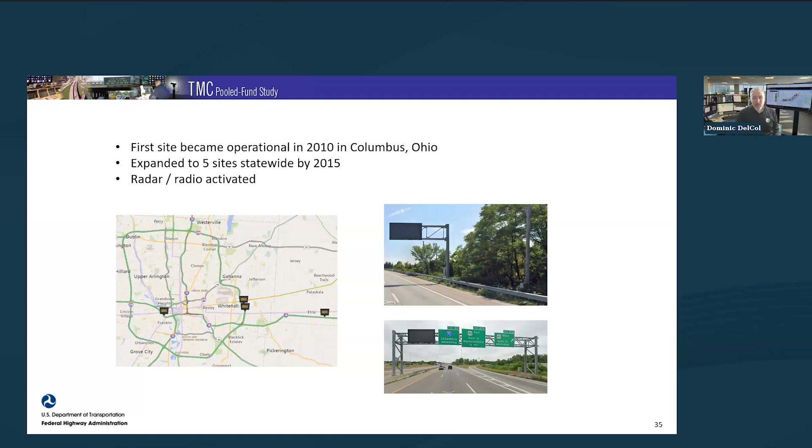Like for instance, if it was a holiday and there wasn't any traffic, we would have to take them down, or maybe rush hour started a little late, etc. Right. So this process lasted about 10 years. The signs were basically an afterthought. They were often taken offline for long periods of time, even during construction, which would probably be the most helpful time to have these signs activated, to alert vehicles ahead of queues.

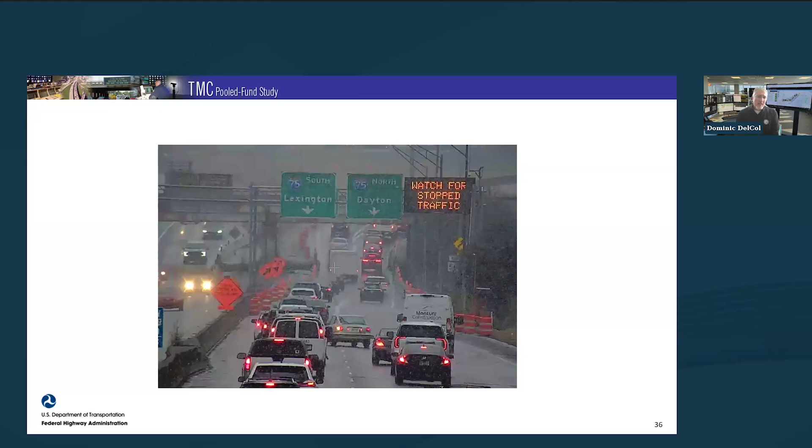Next slide, please. This is just an image of one of our sites in Cincinnati. As you can see, it looks like it's in the middle of a snowstorm, and this is actually when it was active in the middle of construction. This is one of our 2 locations in Cincinnati. Next slide, please.

So this takes us up to almost present day. So on November 14th in 2023, there was a fatal bus crash just outside of Columbus, Ohio on westbound I-70. Traffic was queued up due to an incident on the right shoulder about a mile ahead of the crash. The bus was carrying a high school band from Eastern Ohio to Columbus, Ohio to perform a concert.

A semi-truck traveling at an excessive speed collided with an SUV. Inside the SUV were a teacher and 2 chaperones. The SUV then collided with the bus with such force it took hours before first responders even realized there was a vehicle between the semi-truck and a charter bus. ODOT knew for years that end of queue crashes were a major problem and only getting worse, mostly due to distracted driving. Unfortunately, sometimes it takes a tragic event to cause change.

So, important note, during this time frame, ODOT was in the midst of a massive expansion of our wrong-way detection system, which is also a major issue, obviously. So systems were in Cincinnati. Locations were added in Cincinnati. The Dayton system was just coming online. Cleveland was just being installed. So our ITS section basically had to make a hard pivot and use some of the same technologies being used in the wrong-way systems to install a whole new from-scratch queue warning system on the fly.

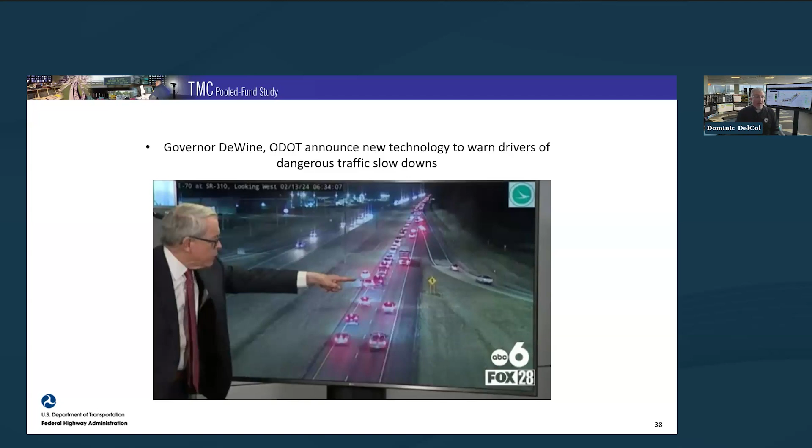It's estimated that there were a total of 8,800 end of queue highway crashes in Ohio in 2023. So this is the exact location of that bus crash a few months earlier. So it is a normal occurrence during morning rush hour. The site became active on February 15th, about 3 months to the day of the fatal crash. In ITS project terms, it's almost moving at light speed. So from the bus crash to the installation of the new site was about 3 months, which is unbelievable in our terms. Next slide, please.

So this is that. Oh, could you go back a slide? I think we skipped one, maybe. There we go. Okay. Yep, there we go.

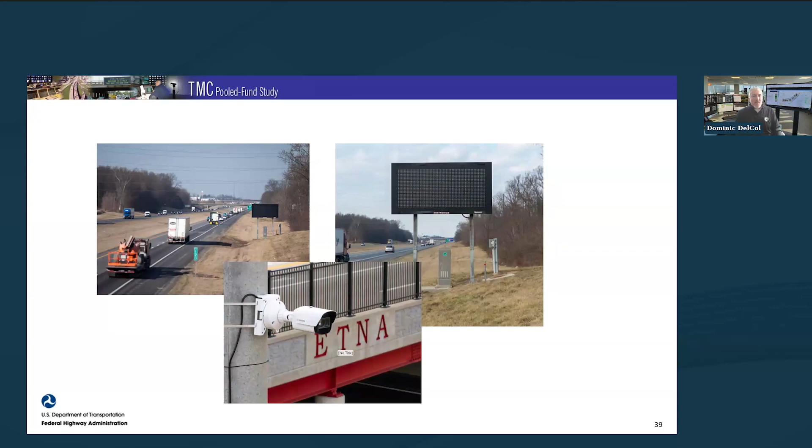So this is actually that new site out at State Route 310. It actually uses fixed queue detection cameras. They're actually mounted on a pole. So this is actually about a half a mile behind where the fatal bus crash was. That overpass, I don't know if you can kind of see it in the background, that's actually State Route 310, and the on-ramp from 310 to westbound is a heavy merge area and causes a lot of morning congestion. So that's what actually helped cause that crash. Next slide, please.

So the new system uses Milestone alerts. We use stationary cameras to help detect slowdowns and it actually sends alerts through Milestone. Milestone is actually the system we use to view cameras in our traffic management center. It helps to detect slow and stopped traffic. Traffic ahead messages automatically post to queue warning signs through our ATMS.

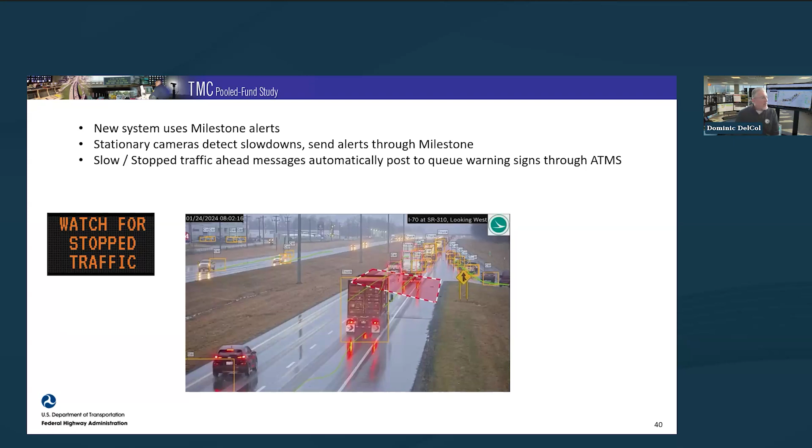I think there's a video attached. Would you mind playing it?

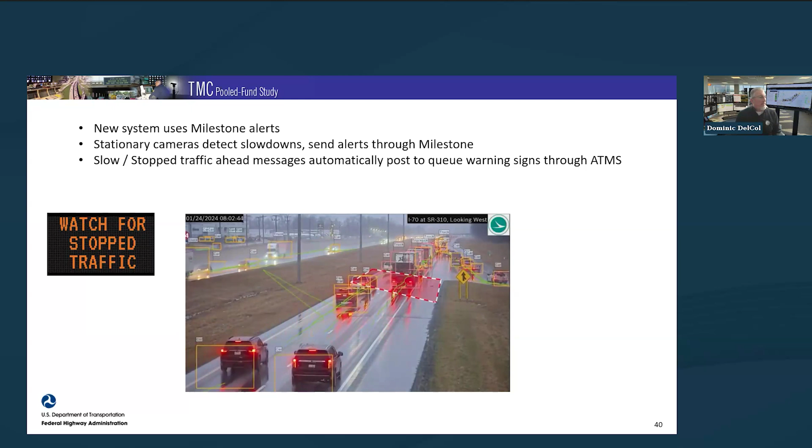So as you can see, as traffic goes through these areas and goes through the box, it's basically sensing how much time the vehicles are spending inside the red box, and that's what helps trigger the queue warning signs through our ATMS. Next slide, please.

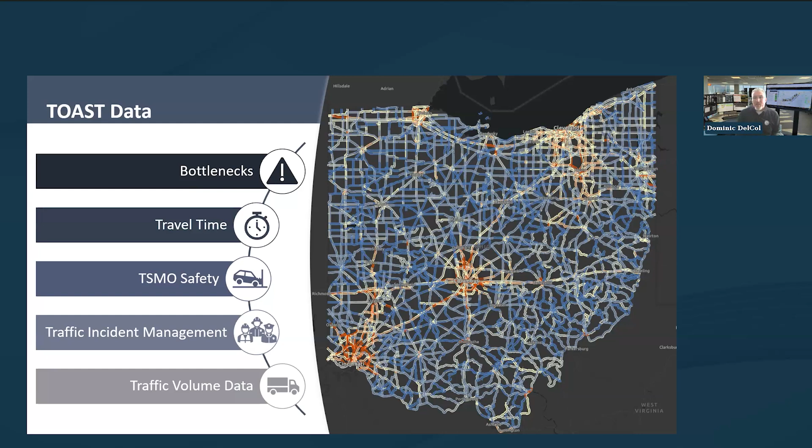So this is TOAST, the Traffic Operation Assessment Systems Tool. Basically it's a scanning tool to help identify operationally sensitive corridors that may benefit from TSMO strategies. We scored 11,000 corridors statewide using 5 main data categories: bottlenecks, travel time, TSMO safety, traffic incident management, and traffic volume data. We also use bottlenecks and travel time probe-based crowdsourced data. We use all of this data along with ODOT district input to help determine the locations of our new queue warning systems. Next slide, please.

So using all of that data, we helped determine 13 locations throughout the state to install these new systems. These sites will be in and around major urban centers that have been identified by ODOT as high congestion, high crash areas. Once the technology is installed at all 13 sites, ODOT anticipates it will help reduce end of queue crashes by at least 16%, which equates to around 1,400 crashes. These sites are expected to be active within 2 years. That's really all I got.

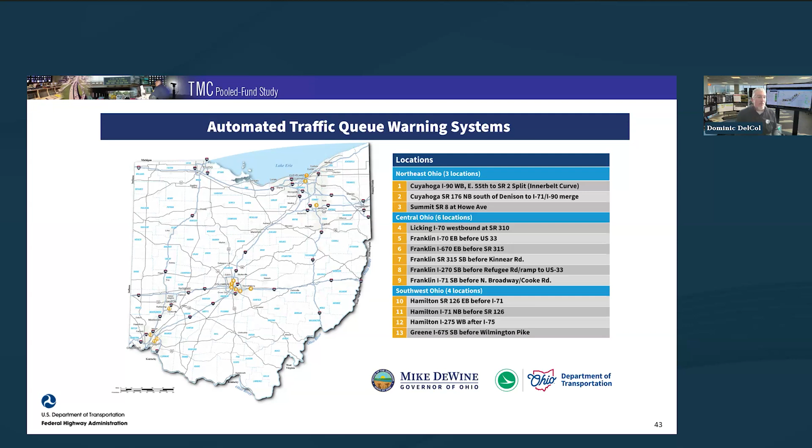Okay, thanks, Dominic, for that fascinating look into ODOT's alert and warning system. Our final speaker, David Gaffney, is the TMC Operations Manager at Pennsylvania DOT, and he will be talking about Pennsylvania DOT's use cases and implementation of queue warning messages. Thanks, Alex. Good morning, everyone. Like Alex said, I'm going to discuss PennDOT's experience with queue detection, monitoring, and management.

Next slide. So for us, there are a couple of different ways we had managed queues in the past, and to some extent, we still use these methods in certain areas. The first one is work zones, where we would rent a queue detection system through a construction project as part of the work zone traffic control plan. The concern with those is they're often very expensive. And if they're not programmed into the funding for the project, it can be difficult to add these systems to projects later. This has sometimes led to decisions not to use the systems. And for the safety benefits of the systems, we really wanted a solution that would allow us to better manage those queues in work zones.

The other method is using manual detection. So an operator sees a queue and then reacts to that queue. Often those operators are working on multiple incidents or roadways all at once, and it can be difficult for them to keep up with the changing queue. They also may simply create a message that addresses the cause of the queue, but not where the queue is or where that concern is for those drivers. So with that in mind, we started working on a solution that could be deployed quickly to corridors where existing probe data or detectors could provide a level of queue detection, and then from there, monitor and message those queues in ways that operators can't, at a much lower cost than some of the traditional queue detection systems. Next slide.

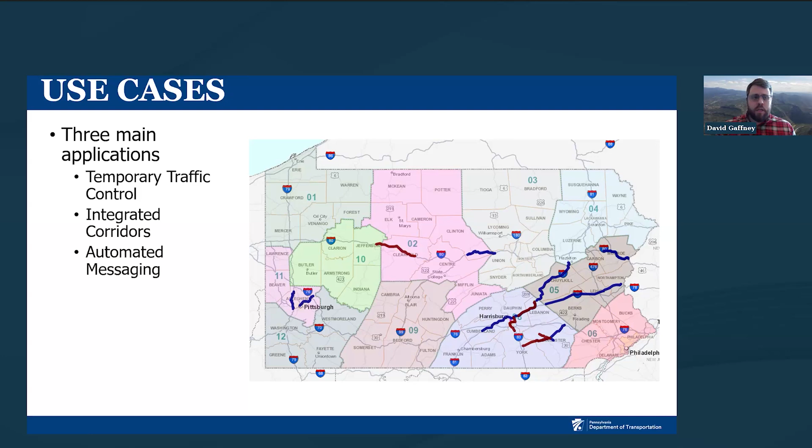So the first major corridor that I want to talk about is the Schuylkill Expressway corridor, Interstate 76 near Philadelphia. The corridor is one of the highest traffic routes in Pennsylvania with heavy congestion and traffic nearly every day, weekends included. The expressway has limited room to expand from 2 lanes because of the challenging terrain in that area. There's a river on one side and a steep embankment on the other.

In the last few years, there have been multiple TSMO projects to help improve safety and mobility along this corridor. The first part of that effort included deploying variable speed limit signs and queue detection. For this corridor, the VSLs and queue messaging are coordinated to give drivers the best possible information of where they will encounter the queuing and when they could see slowing traffic. Next slide.

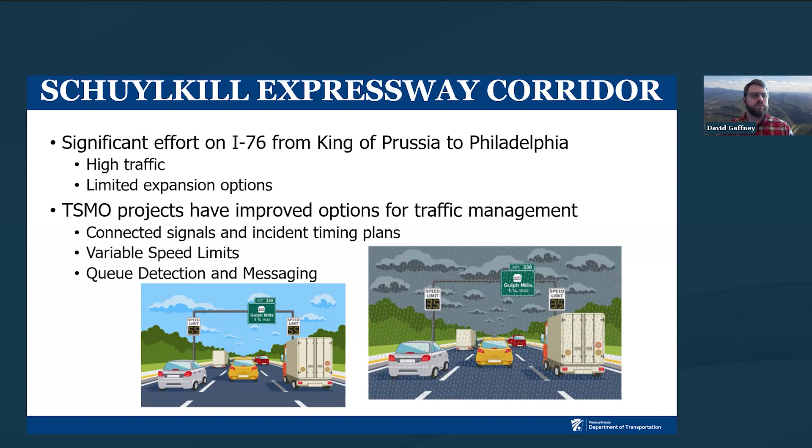So for the Schuylkill Expressway, the messaging and speeds are detector driven. So in addition to deploying VSL signs and CMS, the project deployed detectors. There were also existing detectors on the corridor that were integrated into the system. This provides closer to real-time speeds and messages. There are 2 messages that we use to provide queue information, one for slow traffic, where speeds drop below 40 miles an hour, and one for stop traffic, when speeds drop below 20 miles an hour.

Due to the density of devices and traffic patterns on the corridor, the messages are posted only between 1 mile and 3 miles upstream of the queue. These messages complement the VSLs, and when speeds begin to drop, the VSL signs will step down the speeds in advance of the queue to further warn and slow traffic. Next slide.

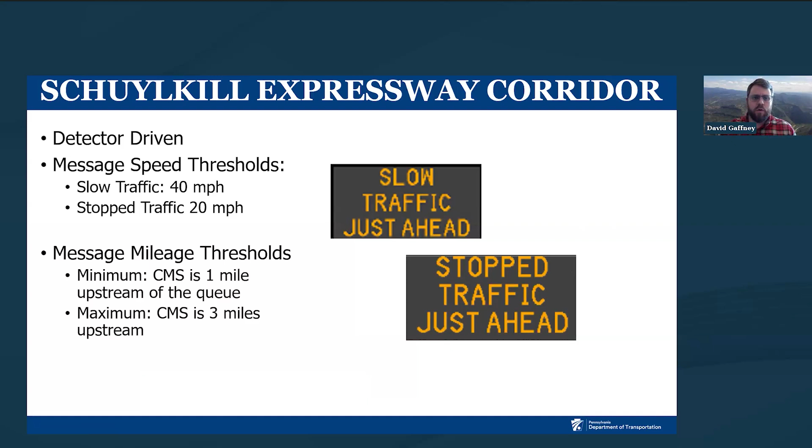So for this corridor, the messaging and speeds are detector driven. For any projects like this, it is important to evaluate the impact the changes have had to both mobility and safety. In this case, the corridor was analyzed for 2022 and 2023 after the system was implemented, and compared to pre-pandemic traffic data. We've seen a reduction in crashes, a reduction in rear end crashes, fewer crashes with injuries and serious injuries, and a reduction in travel times throughout the corridor.

We have encountered some challenges with the system as it ages, and we learn more about the capabilities of devices. One of the major lessons learned from this project in particular is that when we integrated the existing detectors, their calibration and maintenance have been very challenging. So moving forward, we want to consider that we add detectors to the project to replace existing detectors so we don't run into those challenges in the future. Next slide.

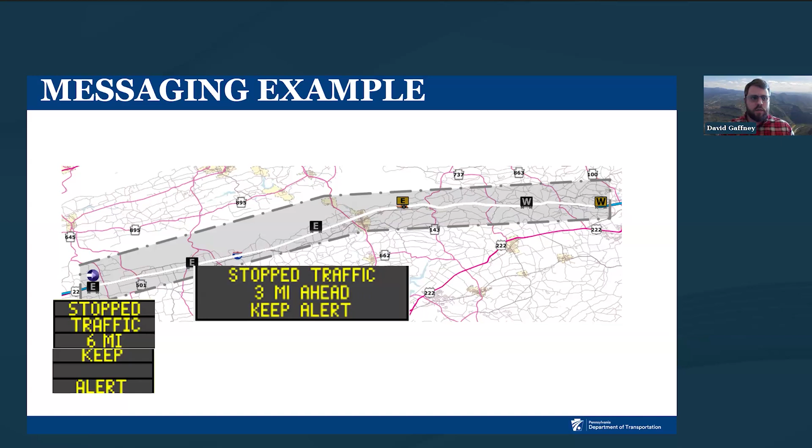This is an example of the messages that are posted using a couple of different sizes of CMS and the different distances on I-78. Similar to 76, the speed thresholds are set to display stopped or slow traffic. In this case, the slow traffic threshold was set at 45 miles an hour and the stop traffic threshold was set at 30 miles an hour. Again, these speeds can be configured by the corridor, so depending on the prevailing conditions, we can adjust those as needed. Next slide. Again, one more slide.

So kind of moving towards the future, some of the ongoing efforts that we have for work zones. We are purchasing modems through STIC funds. This will allow quick deployment to portable message boards that we can then connect into ATMS. We're going to continue looking to develop or deploy similar solutions in the coming years.

And then the other piece of that is we've deployed a lot of VSLs over the last couple of years in rural areas specific to weather, but we're also looking to integrate those into our ATMS and then use those to support work zones as well as queue detection in other areas. So like I said, we have those modems. We're going to be connecting them to those corridors and trying to improve our queue protection functions through work zones. Next slide.

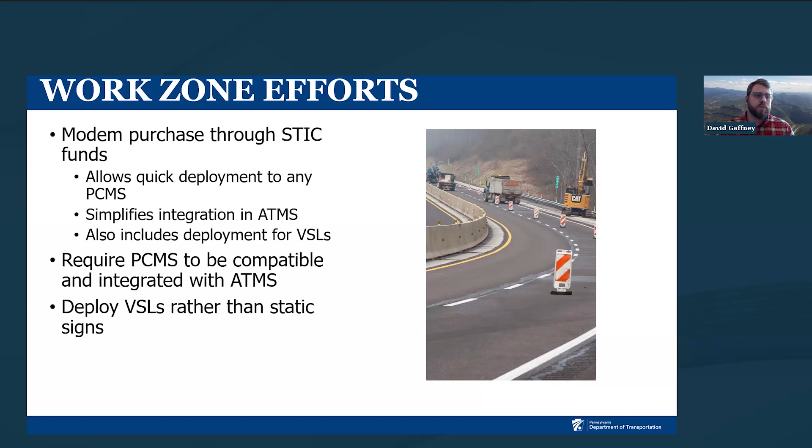So in addition to those, we have automated other messages as well, specifically around hazardous weather conditions. So like those queue protection messages, it can be difficult for operators to keep up with the snow squalls and other conditions that roll through certain corridors.

So these systems and these areas use road weather information systems data to determine when specific conditions exist and post the messages accordingly. The distances are configurable, so if it's further away from an RWIS station and we think that there's maybe a condition or a change in the conditions that we're going to see there, we'll adjust that distance to be as appropriate. Most of the interstate network is within a 15-mile radius of an RWIS station. And we have deployed RWIS stations at key locations to help support these.

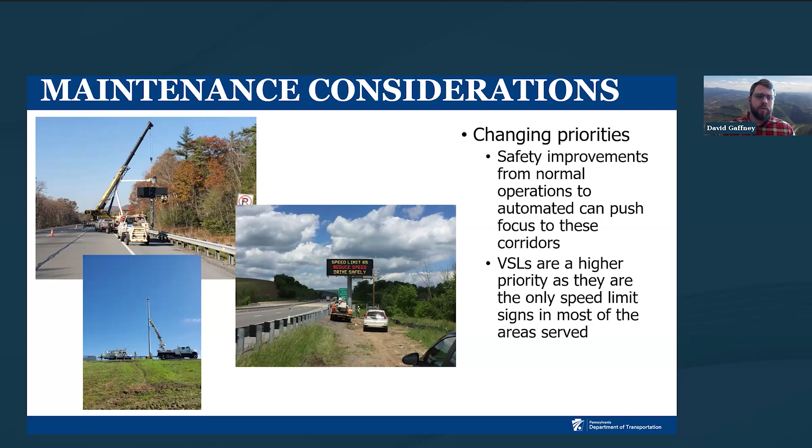The other piece with the VSLs is they've replaced permanent static speed limit signs and function as that speed limit sign in those areas. So there are a lot of safety implications of those devices that we have to make sure we address. And I don't think we fully realized the impact these would have, and hadn't gotten to the point where we were prioritizing them as quickly as we should have been early on. So that's one of the major lessons learned that we have from this. Next slide.

So where are we going in the future? We're planning to deploy queue protection weather warning corridors statewide. In the Pittsburgh area, design is underway for another corridor similar to what we have on the Schuylkill Expressway. The route faces similar constraints as the Schuylkill Expressway, where there's not a lot of room to expand, but there is high traffic. So other areas are also deploying additional VSLs and CMS to take advantage of the queue protection, and some areas also taking advantage of automated weather messaging.

We're constantly looking for more opportunities to improve the capabilities of the devices and systems we deploy, and to help our operators effectively manage traffic. Next slide.